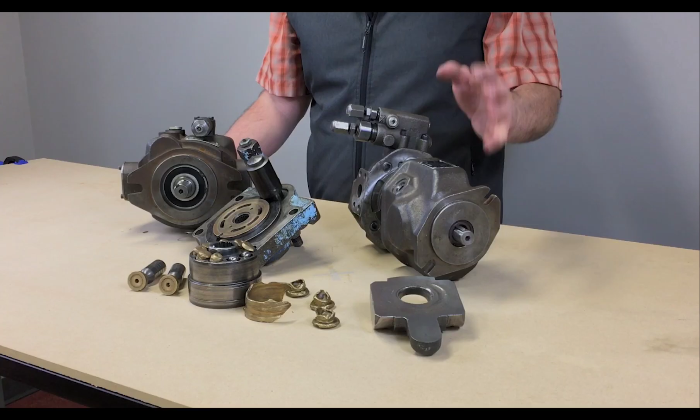We're going to build a pump together and find out what pieces are needed on the inside to have a complete pump, and we'll look at some of the basic features and functions. We're going to move on to find out all about pressure compensation, an important function popular on most piston pumps. We'll be moving on after that to a very tricky feature called load sensing, and we're also going to find out what makes these pumps wear out and fail. Last but not least, we're going to be making adjustments, and we're going to do some pump volumetric efficiency testing.

I've got a few of my favorite piston pumps with me. I've got a model here by Parker that just has pressure compensating on it. I've got just the cap end from a Denison pump, a pressure compensated pump. I've got some leftover pieces, unfortunately, from a couple of different Sauer Danfoss pumps that didn't get the care and feeding they should have had. And this pump here is the one we're going to use for our study. This is a Rexroth pump, and while this pump here on the desk has two adjustments, we're going to work with a model that has only the one adjustment as we get started.

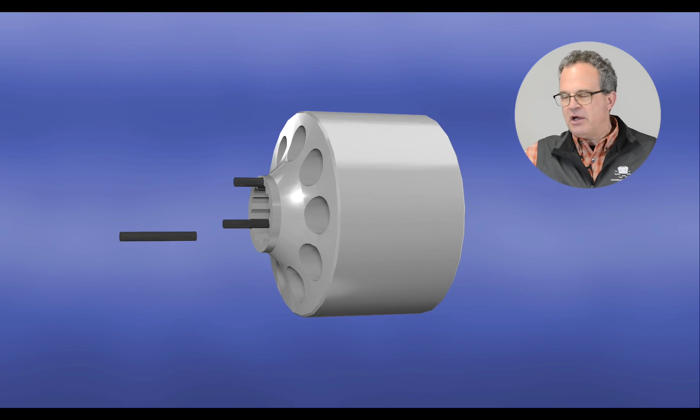Let's start with a cylinder barrel with 9 bores ready to receive the pistons. But first, let's put in a load spring and lock it in place, and here come 3 load pins. Now, a spherical washer. And here come our 9 pistons with their slipper pads right through a retaining ring and into their position in the cylinder barrel.

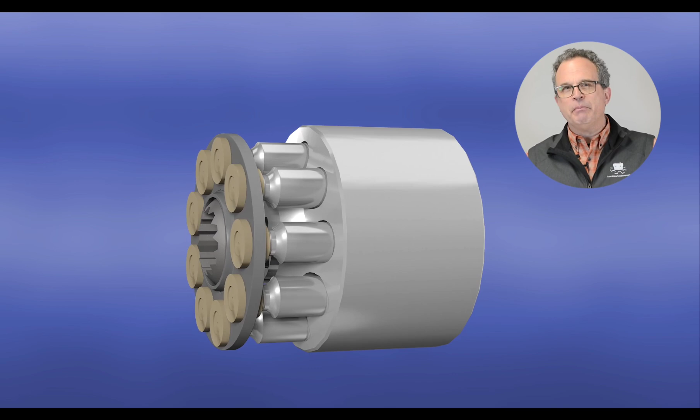Let's swivel that retaining ring with the slipper pads around the spherical washer a little bit just to see what type of important action we get there. Let's also have another look again at why that load spring is in the middle.

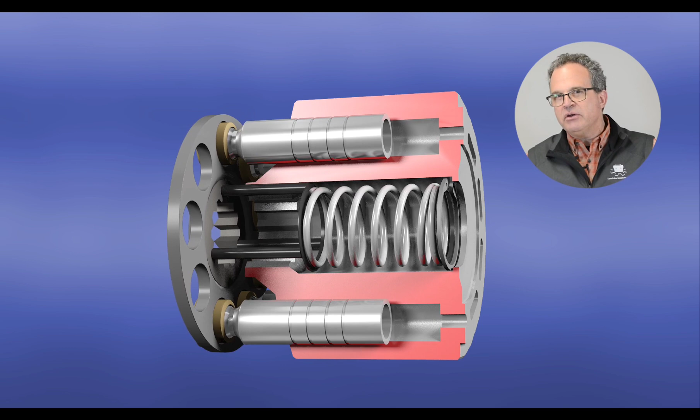Let's compress the pistons and slipper pads with those 3 load pins sitting under the spherical washer and see what's happening with that spring inside the cylinder barrel.

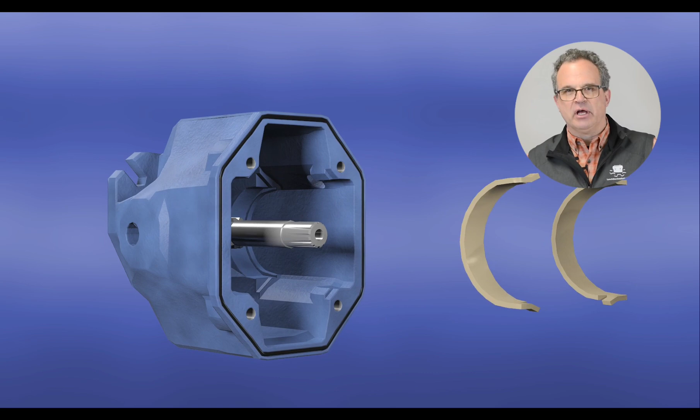Let's bring in the pump housing and install a shaft with shaft bearings. Now we'll bring in the bearing shells that will be needed for the swash plate. Here comes the swash plate. Now we're ready to install the complete rotating group onto the shaft.

Now let's bring in the cap end of the pump and install a porting plate that has a bronze surface. Here comes our control piston, and of course we need a bias piston together with its spring. We're ready to assemble the pump.

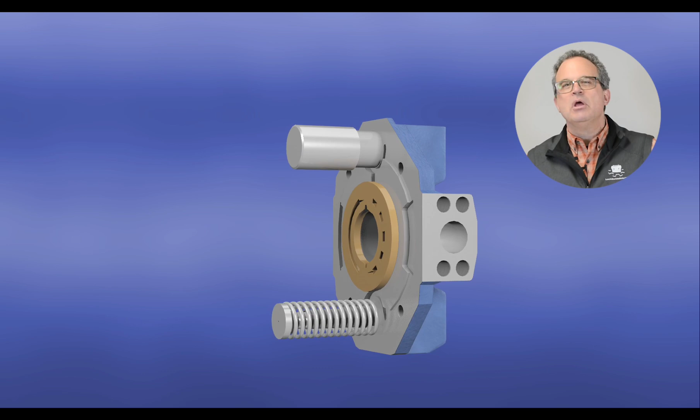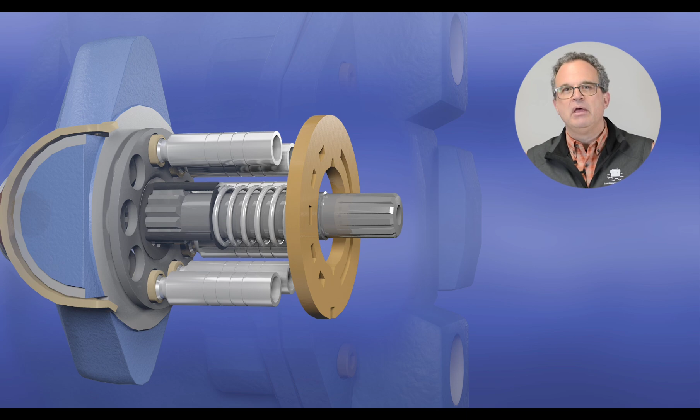Let's install the cap end against the rest of the pump housing, and notice that as we're tightening down the 4 main cap screws, those last several turns of the screw indicate to us that we are compressing that load spring inside the cylinder barrel, because as the slipper pads are pressed hard against the swash plate and the retaining ring is pushing against the spherical washer and those 3 tiny load pins, that load spring in the middle of the cylinder barrel is making sure that we load the porting face of the cylinder barrel against the porting plate.

Our pump is all assembled and ready to go. All that's needed now is our pump control.

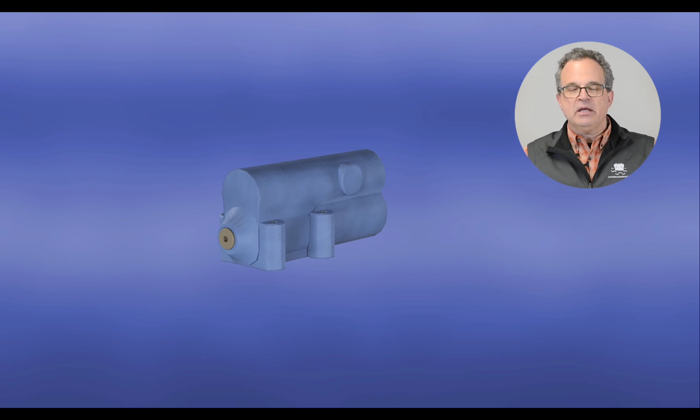In this case, we're going to work with a basic pressure compensator. Here comes our housing, and next we bring in a spool along with a spring assembly. Here comes our adjustment screw, and we're ready to bolt that to the cap end of the pump. If there's anything left to install for accessories, we might choose to have an adjustment screw for a maximum volume adjustment, and down below here, a screw for a minimum volume adjustment. We'll get to that one later.

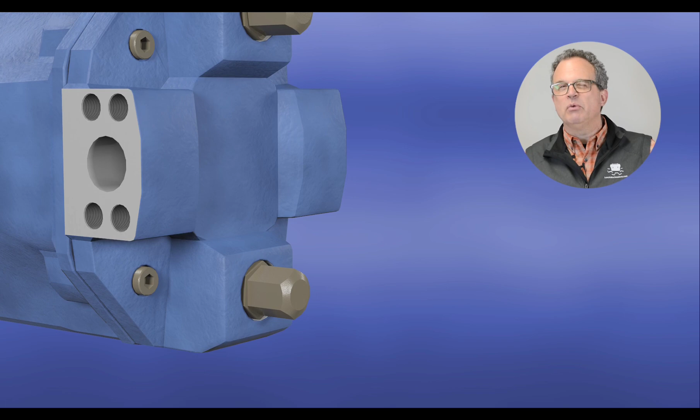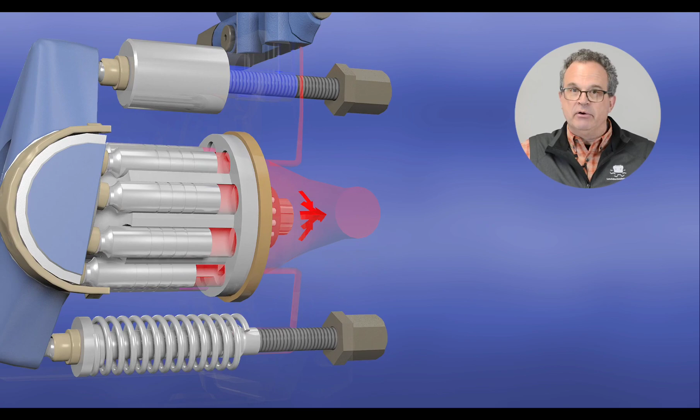Our pump is all assembled and we're ready to fire it up, turn the shaft, and of course, with our bias piston and spring pushing the swash plate to the maximum angle, that's what the bias piston does, we see that our pump is now displacing the maximum volume and the maximum flow rate. Oil is being drawn in on the inlet port and being pushed out on the pump outlet. Our pump is running and we're ready to move on.

We've built up a piston pump, we've seen what parts are needed, and we've learned a little bit about their function. Next, we'll be moving on to the pressure compensator function.